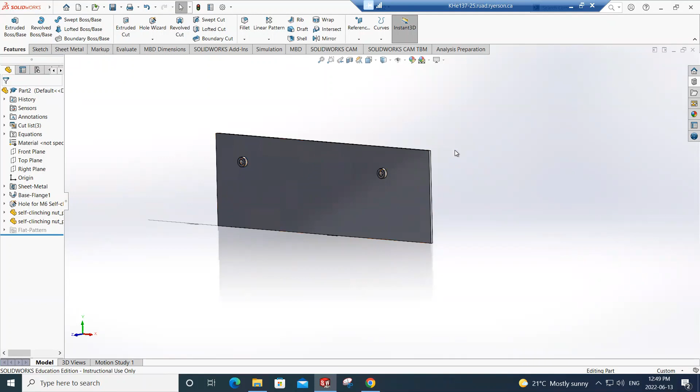In this video, I'm going to show you guys how to install PEM nuts on a sheet metal part. So it's going to look something like this. So let's get started.

What you want to do, let's say you have a part already made, and it's a sheet metal part, stainless steel or whatever other material that you want it to be, and you want to install PEM nuts on it. So first, let's just make a sample sheet metal. If you don't have the sheet metal tab, you can just right click here under tabs. You can just make sure that this one has a check mark beside it. And then you can just create a simple sheet metal part.

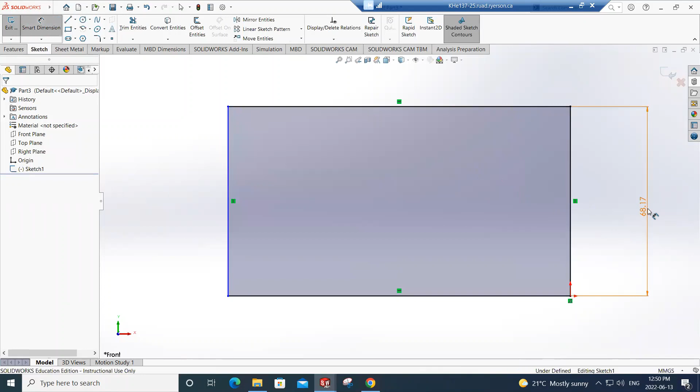This is in inches, so let's make this into millimeters. Say this is 100 and this is 300. Okay.

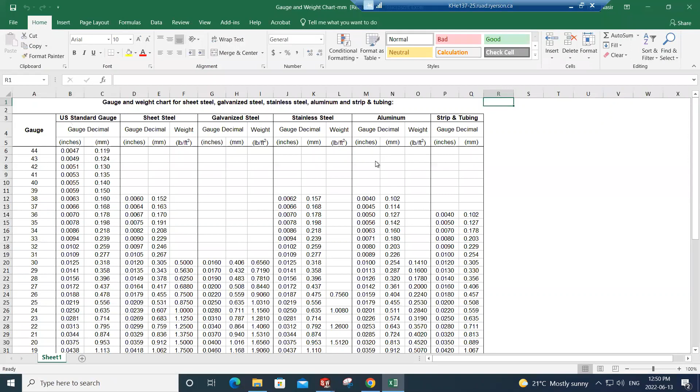So in here, you can either give it a thickness by looking up the sheet metal table, if you have it, or if you don't have that, what you can do is you can say use sheet gauge table, and then you can come down to English, steel English table, and then here it'll give you the option to choose whichever gauge of sheet metal that you want to use. So let's say if you want to use a 12 gauge, you want to do that. You want to keep the bend allowance and the auto relief and the ratio for the relief as default.

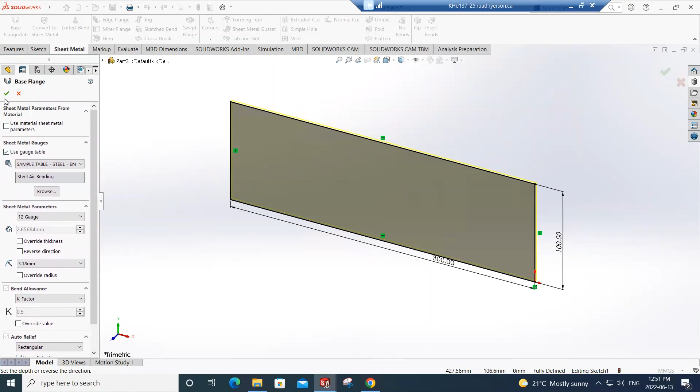So now, before you make the hole for the Pem-Nut, you can't just come here and then create a circle and then extrude cut that, because SolidWorks had made that easier for us. So what you want to do is you want to come to the feature tab and then use the hole wizard. So in here, if you choose a clearance hole, it will give you the option to use or create a hole specifically for the Pem-Nuts.

So in here, as you can see, there's two. There's metric and there's inch. Since we want to go metric, I'm just going to click metric, and then nuts in here. And then for the type, there are several types of Pem-Nuts that you can use for different purposes. There are like self-locking, non-self-locking, a bunch of different variations of the Pem-Nut that you can look up.

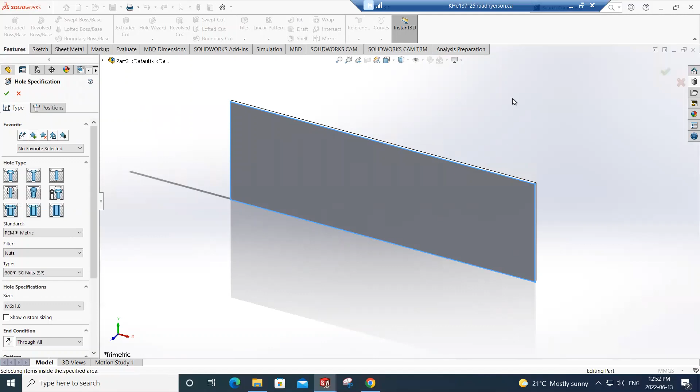But let's say we want to use, so you don't even have to create the nuts itself if you want to make the assembly. If you come to the design library, they already have that pre-made for us. So it will look something like this at first. You can expand the toolbox, come all the way down, and then you're going to see here, Pem-Nuts, inch and metric. So what you want to do is expand the metric part and then go to nuts.

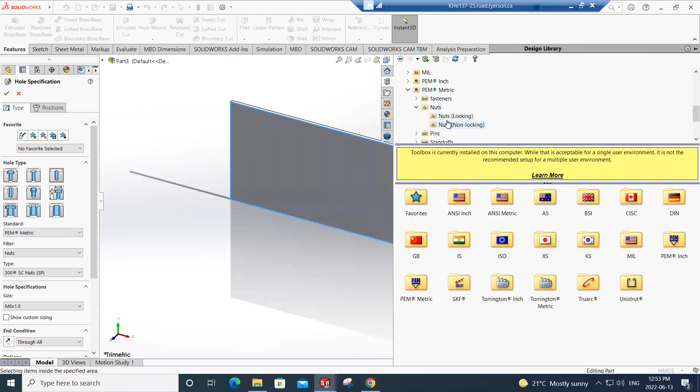And then, as you can see, there's locking and then non-locking. And then in here, you can choose different types. So whichever type that you're thinking about choosing, make sure that you choose that in here. So for example, I went to non-locking, and let's say if I want to use the self-clinching stainless steel, CLS and CLSS, you can choose that specific class of Pem-Nut from here.

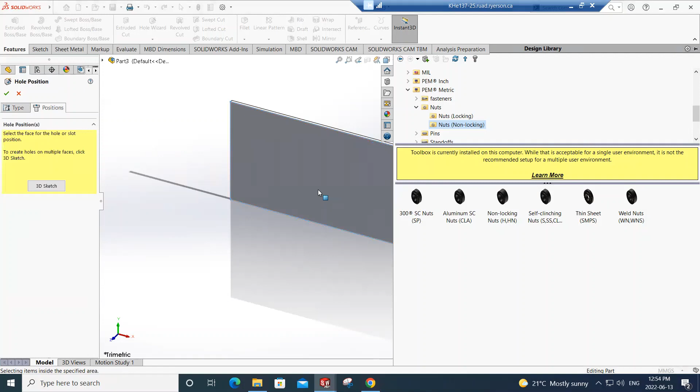So as you can see, they have a bunch. So let's say I want to use this one. As you can see, it's the same class as that one. So this will make sure that it will give you a hole that is compatible with that Pem-Nut. So you want to click that and choose the size of it, for example, let's just leave it at M6, click OK. Let's choose this face, and then you want to create as many holes as you want. Click OK, and then it will automatically create those holes for you.

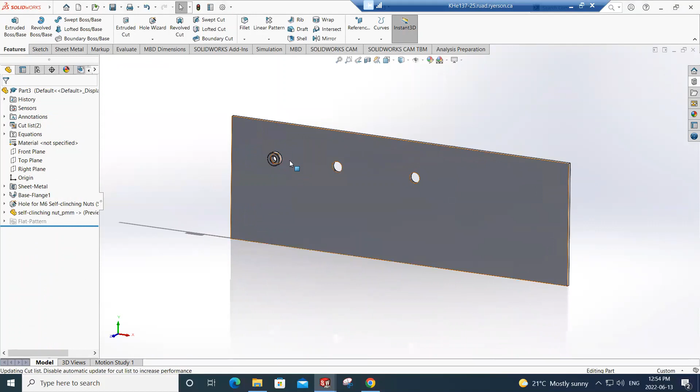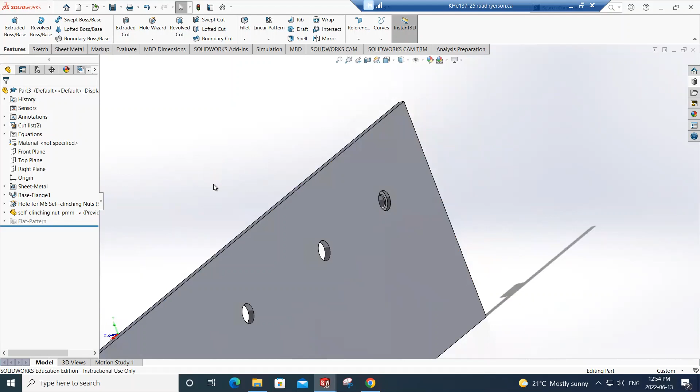Now, what you want to do is go back to the design library, and then you're going to drag and drop these onto the surface. As you can see, it automatically installs it for you. So what you want to make sure is that the backside of it does not stick out of the back surface of the sheet metal part that you're using. So that's an indication of whether you've chosen the right parameters and the right size for the hole and all of that.

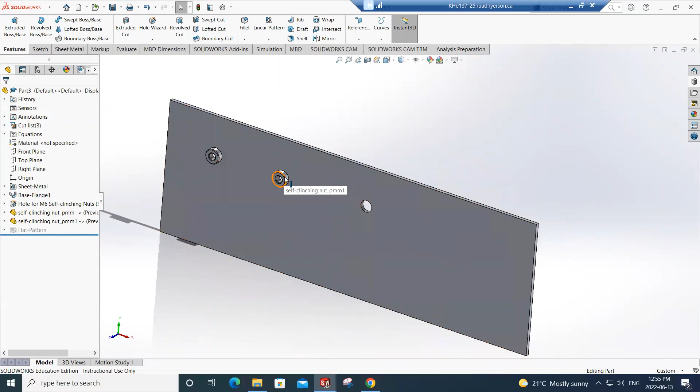So if you want to install a few more, you can just continue the same process for the other ones, and it will give you those holes with the PEM nuts installed on them. So this is basically just an overview of how you can install PEM nuts. Obviously, this can get much more complicated than this, but this is just a basic overview.